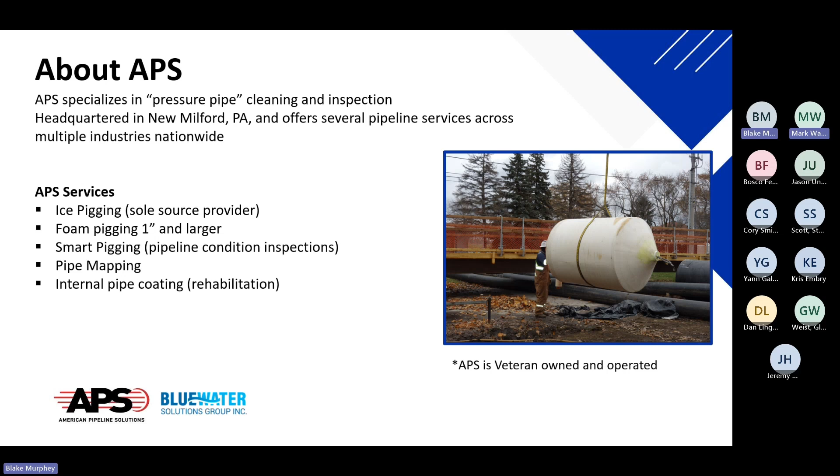Hey, I'm going to probably have you advance a slide. This slide sharing thing, I think it's turned off again. So anyway, appreciate everybody joining this seminar today. My apologies on a couple of things. We babysat grandchildren last weekend, and so I've come down with a head cold, so if I'm pausing quite a bit to keep my mouth from drying out, that's what that's about.

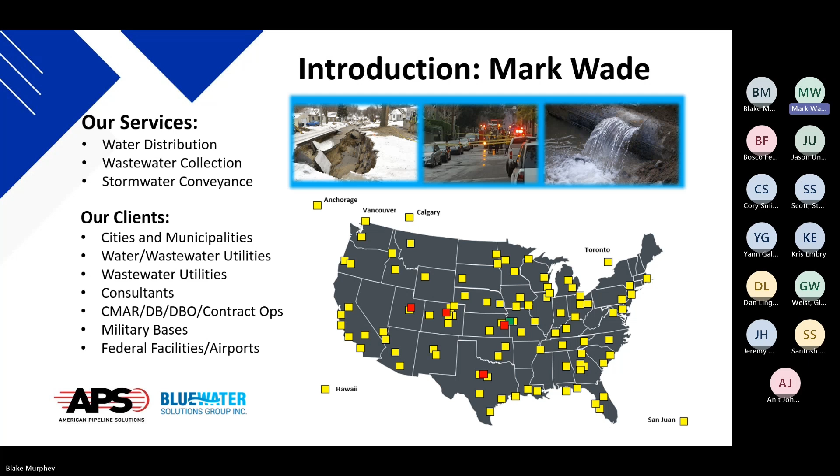Okay, next slide, Blake. This is more about the project itself. It is a client of ours, city of DeSoto, Kansas, which is located just west of the Kansas City area. Since probably the early 40s, they have had a large water utility to provide them with water, as a big facility manufactured and supplied equipment during World War II and also post-war years, about 5 to 6 miles south of town. That's where the water plant is, but the wells are up on the river itself, the Kansas River.

There were at one time, back in the late 40s and early 50s, a total of 10 wells that supplied raw water, that pushed that water 5 miles south of town to the water treatment plant, which is where this other large industrial user was located, and then treated the water. The water that the city was supplied with then was again provided as that water was pushed back to town. So it was quite a complex system at the time. And the city reached out to us in probably the early 1990s.

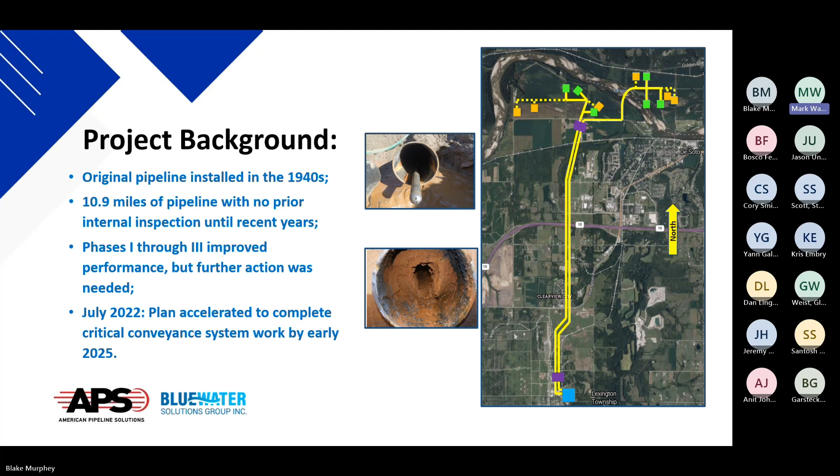So the pipes were jetted and cleaned, until we finally reached a point where we decided we needed some smart technology inside this pipe. Now that the pipe was getting cleaned, what is the actual condition of the pipe, both outside and inside the pipe? Next slide, Blake.

The first major decision, and I think it was a good one, was a group decision made by the folks from APS and ourselves and the client, the city of DeSoto, that if we're going to get in here and start launching pigs, starting with these soft foam pigs, and basically increase the pigging operation with pigs that would be firmer and firmer, with the ultimate launch being a smart pig, we needed to kind of hit the pause button and move forward with the construction of what we describe as permanent pigging structures.

I think there were 3 or 4 of them that we had built, and it was on an accelerated schedule. So we accessed the water main. We focused all of that effort on getting these structures in place with valving that would accommodate the launching of these pigs.

These structures would then be used for routine preventive maintenance, launching firm pigs every 3 to 5 years. As we saw pressures increasing in the system, the crew would go back out and redeploy the pigs and keep them cleaned.

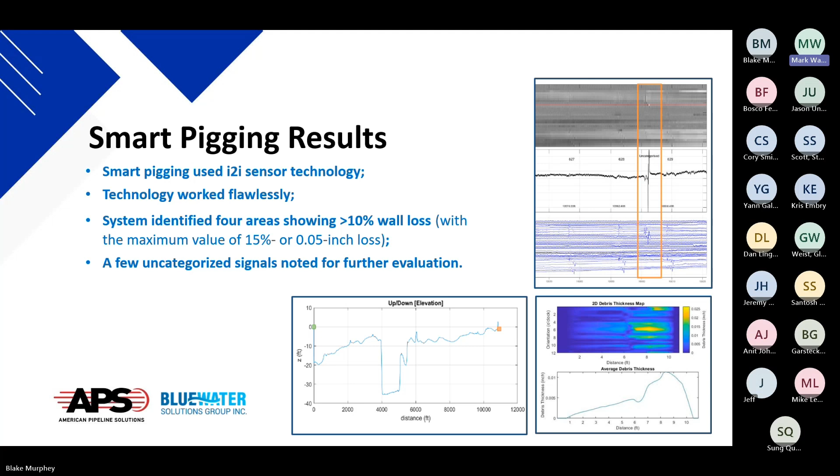And the news got better. Those uncategorized signals that the tool detected, of those, we identified pipeline anomalies. There were 34 of them, and we were expecting it to be much larger because this is a 70-year-old pipeline.

It has operated continuously every day for 70 years and has never been inspected. It's never been cleaned. Nobody's ever been inside this pipeline unless it failed. And actually, even the maintenance records on the pipeline were limited. Of that, we only found 4 areas of concern, and one of them got dropped off.

So we really had 3 points in this pipeline that we knew we needed to go back out and reevaluate. That was simply to exhume that part of the pipe and see what was going on at these 3 particular areas. Thankfully, none of them were under the interstate or under the Kansas River, so we were happy about that result as well.

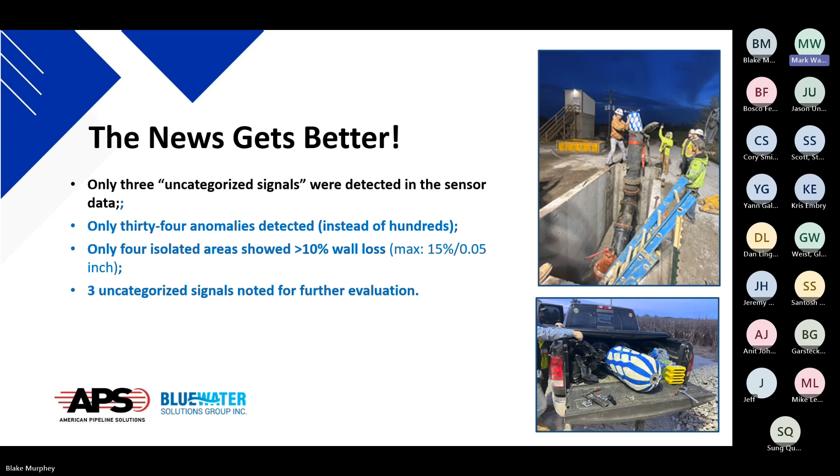So the bottom line here - there's a big, thick report on this project, since we had to produce the report to the city, and there was a lot of back and forth discussion about what's next. The city shared the results of that with Panasonic as they were getting ready to put their facility online and needed a large amount of water.

There was no structural compromise found because we restored the hydraulic reliability of the pipe, going from a 5-inch diameter hole back to the full 16-inch diameter. We immediately got hydraulic responses from that. Operating pressures dropped significantly from say 150 PSI - we were finally operating the system down to 30 or 40.

No immediate corrective action was needed. We also put together a longer-term asset management program to make sure over the next 30 to 50 years, the city has the right resources in place to keep these twin pipelines humming for as long as they need it.

Next slide. Oh, and the future - see, is this? Yeah, this is my slide. I think this may be my last one. Future benefits.

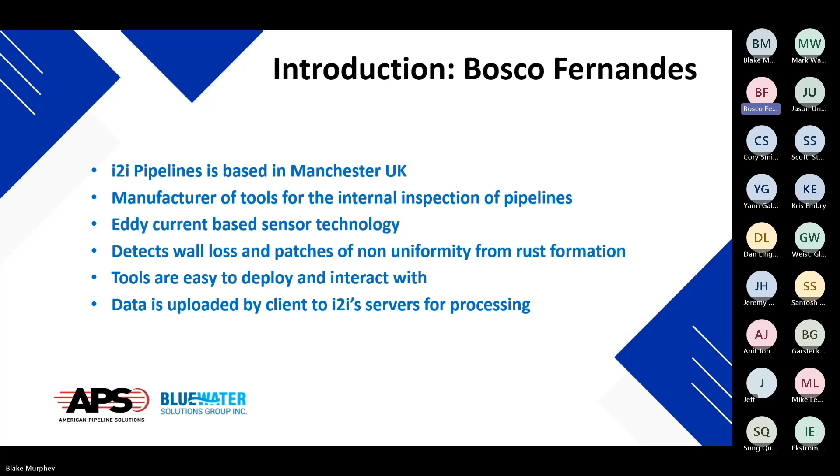As the tool is propelled through the line using the medium that is inside the line, in this case water, it collects data from the internal surface of the pipe wall. So we measure the changes in the internal surface of the wall.

Inside the pressure vessel itself is an IMU, so we can detect pitch, roll, and yaw, and changes in direction. And we tie that up with the data that we get from the eddy current and the odometer in order to create a picture of what's happening in the pipeline.

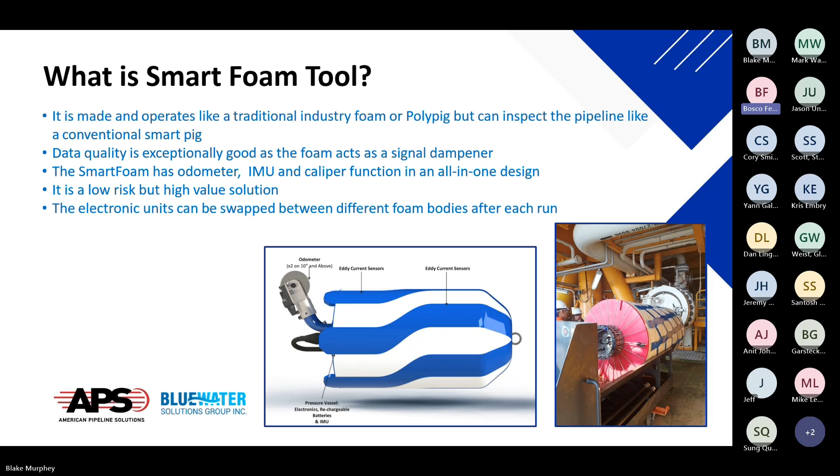So with this kind of caliper, the pipe could squeeze into a restriction that's around 30% or even more of the pipe ID. Can I have the next slide, please, Blake?

So our sensors are able to inspect steel, ductile iron, stainless steel, and we also have sensors for non-metallic pipelines, fiberglass and HDPE. Not eddy current sensors, but we have combinations of other sensors and calipers, etc.

So we're doing a lot of work in water and force main pipelines of late, most of them in the USA at the moment. We operate all over the world, but most of these lines are in the USA. And they come with their own set of challenges. We initially thought that it would be a walk in the park compared to being offshore on an oil and gas platform. But actually, sometimes they're quite challenging.

Some of the lines might have T-bends in them, which our tools have to negotiate and come out on the other side undamaged. Quite challenging, but we've developed innovative ways to go through these lines and actually get data that has some meaning at the end of the run. Next slide, please, Blake.

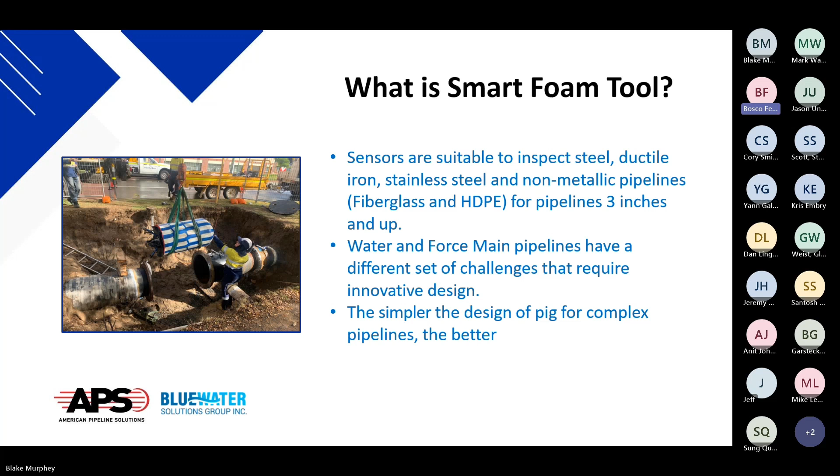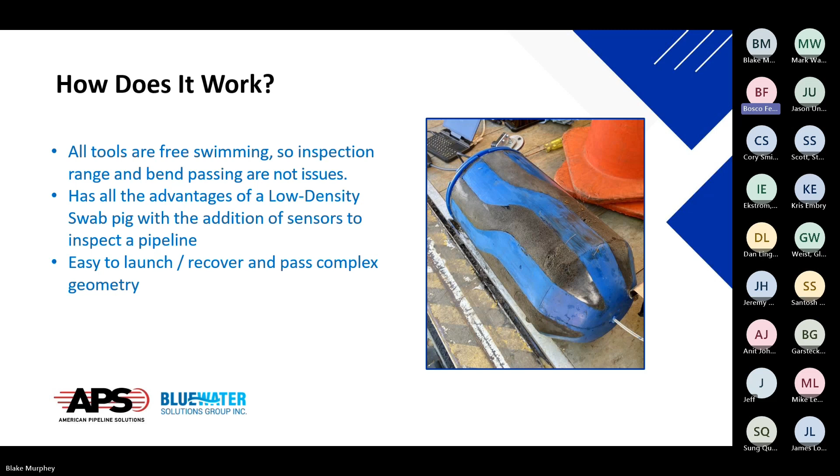they still collect data and we get a good set of information to process. As I said earlier, our tools are easy to launch and recover, and they can pass through complex geometry. This is actually my last slide. There's one thing I haven't mentioned that I would have wanted to show you. It's in one of Blake's photographs, he shows our tool with a cable attached to the end. That's what we call a communications cable, and we use that cable to switch the system on, download data from it, and to charge it.

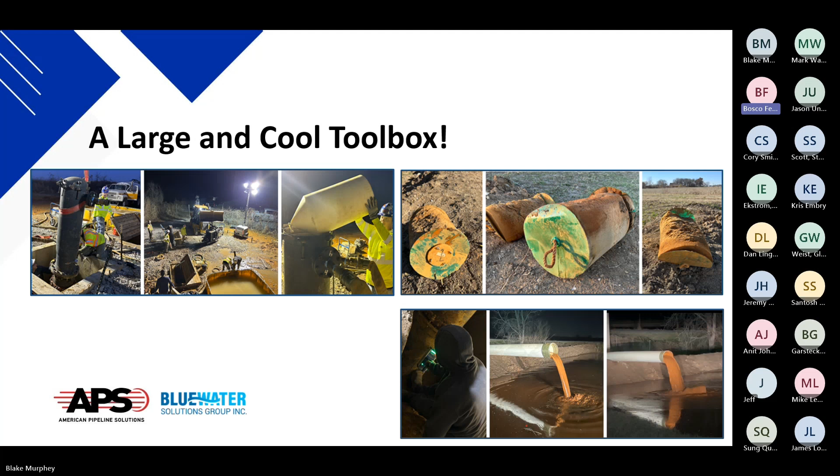I think that picture will be maybe further down. Blake, if you go to the next slide. Next slide, please. Next, please. Next.

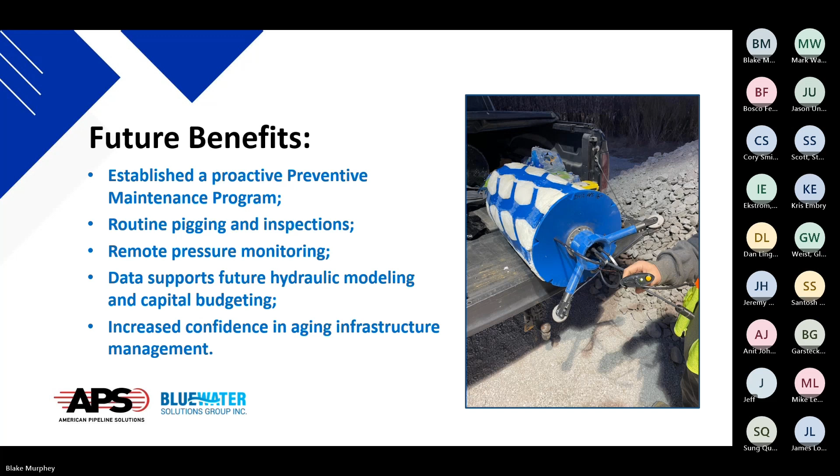I think that's all I really have to say now. Thank you very much for your attention.